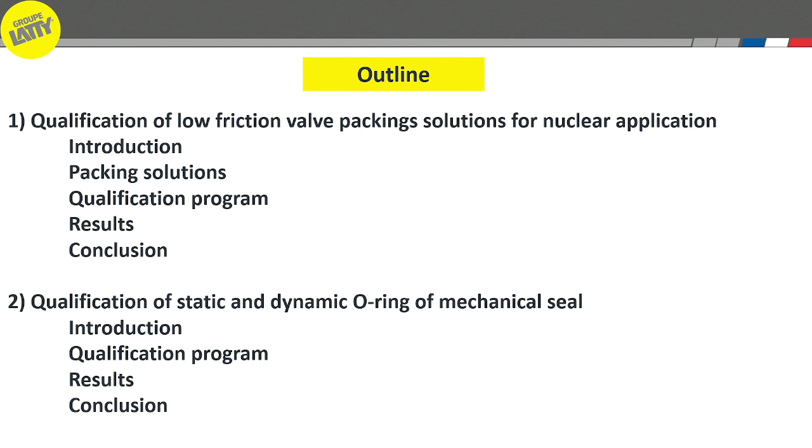Today I have the pleasure to present a couple of studies aimed at the topic of post-Fukushima sealing solutions, with two sealing solutions: a gasket solution, an O-ring solution, and a packing solution for valves. The outline of this presentation is divided into two subtopics. The first topic concerns qualification of low friction valve packing solutions for nuclear applications, while the second study concerns qualification of static and dynamic O-rings for mechanical seals, also dedicated to nuclear applications.

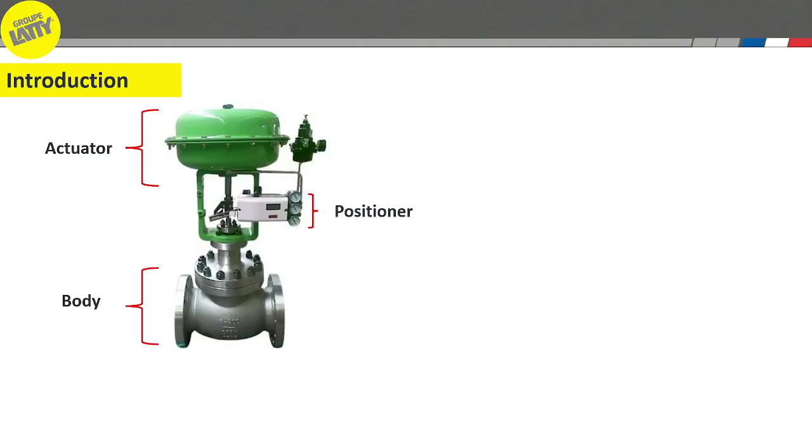Let's start with the first study. Here we have an example of a valve. The main structure of a valve is composed of an actuator which drives the stem, and a positioner which gives us the desired position of the stem, and we have a body where the pressure is confined and sealed.

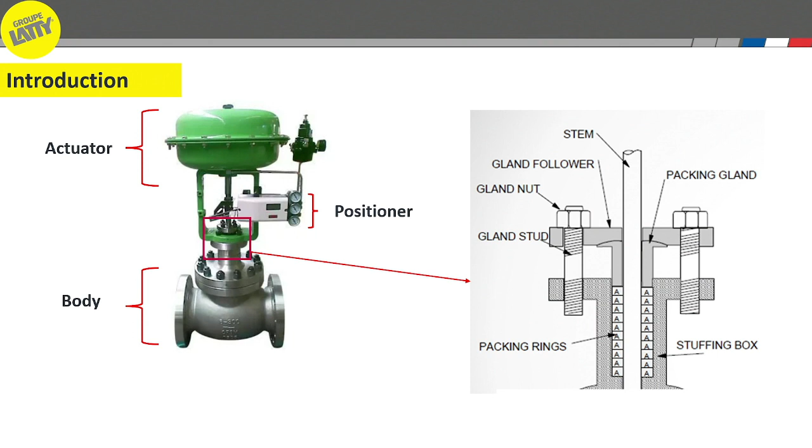In the valve, generally you find a sealing solution to avoid fluid escaping from the confined fluid to the atmosphere. Here we are concerned with a packing solution. A packing is generally composed of rings stacked in the stuffing box and compressed by means of a gland follower due to the force and effort generated by the tightening system. The basic composition of packing is shown here, and the ultimate goal of such a sealing solution is to prevent fluid escaping from a high pressure confined fluid to the atmosphere environment.

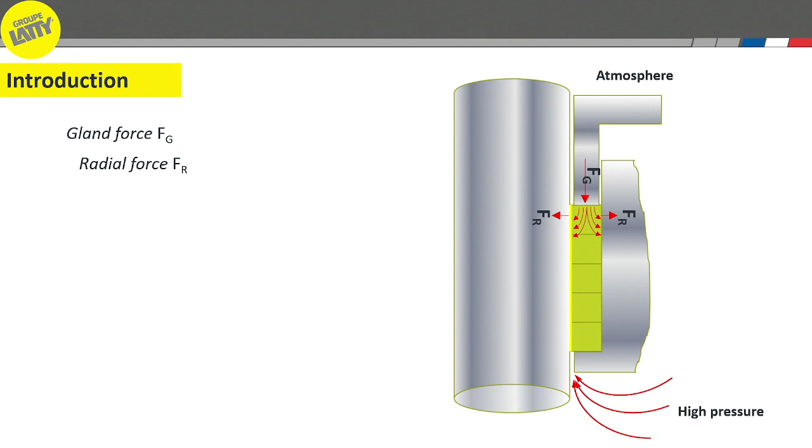With a packing solution, this is seated by means of the gland force applied by the gland follower on the ring stacking, which is then converted to a radial force and an axial force, transmitted and repeated through the stuffing box.

When the stem is actuated, we create a relative movement between the stem and the sealing packing, and this generates a dynamic friction force between the two moving parts. This gives us a general situation: by increasing the gland force, we tend to eliminate the leakage, but at the same time we increase the friction coefficient.

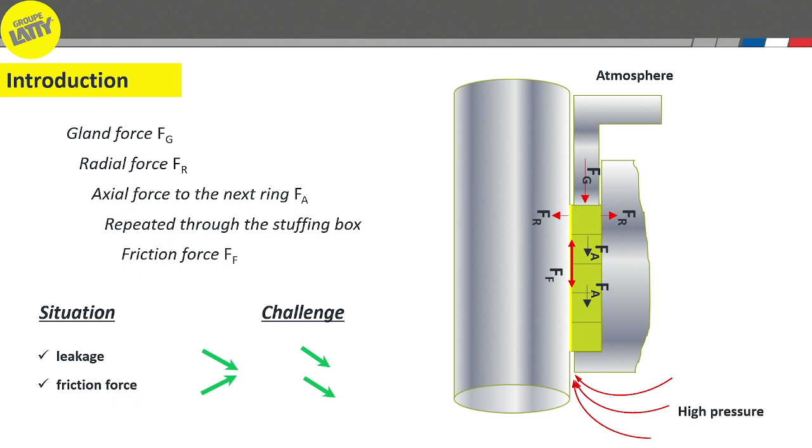The desired and ultimate goal when designing a packing solution is to get a solution where the friction coefficient is the lowest and the leakage is eliminated. So the aim when designing a packing is to achieve both tendencies: eliminate leakage and fluid escaping, while reducing the friction coefficient as much as possible.

The friction coefficient of packing is one of the most crucial parameters which directly influences the maneuverability of a stem on a valve, and this parameter was identified by EDF as one of the axes of improvement in order to avoid changing the actuator's strength and power, and to avoid heavy modifications on the valves.

In this context, LATTY International developed two kinds of solutions with different materials dealing with this issue, to achieve a low friction coefficient which allows us to avoid tough modifications of the valves. These two developed solutions needed to be qualified. A partnership was launched by EDF to qualify these two products, and this qualification was carried out within the CETIM laboratory.

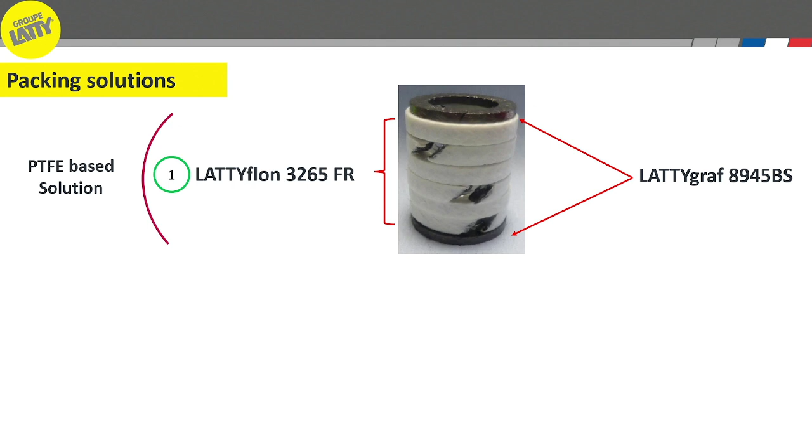Now we will see the sealing solutions together. The first solution is a PTFE-based solution, composed of sealing rings and end rings at the top and bottom. The sealing rings are a combination between the LATTYflon 3265FR and the LATTYgraf 8945BS. The second solution is a graphite-based solution, a combination between the LATTYgraf 9110, and we kept the same solution for the end rings, which is the LATTYgraf 8945BS.

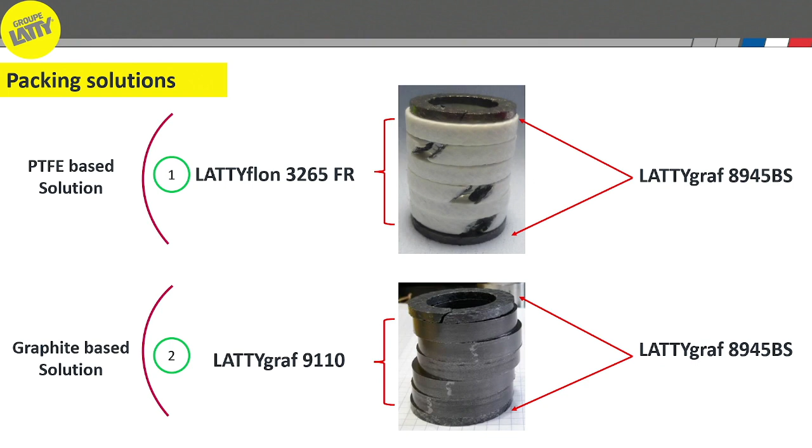To see this in detail, the LATTYflon 3265FR is a PTFE impregnated carbon yarn in the middle of the ring, in the core, covered with PTFE braided yarn treated with a special lubricant in order to reduce the friction coefficient. All this material has been treated with a corrosion inhibitor in order to protect and avoid any chemical corrosion reaction between the stem and the sealing solution.

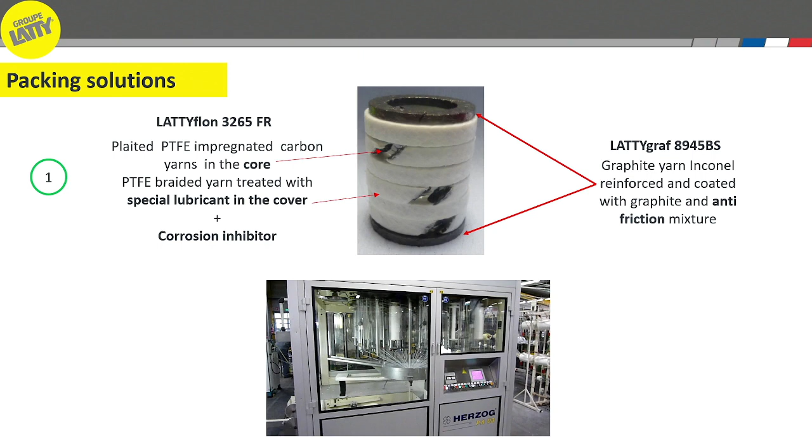While the LATTYgraf 8945BS is made of graphite yarn, Inconel reinforced, and coated with graphite and also a kind of lubricant or anti-friction mixture. To show you the braiding process, I have a movie. I'll try to start it for a few seconds to show you the braiding process.

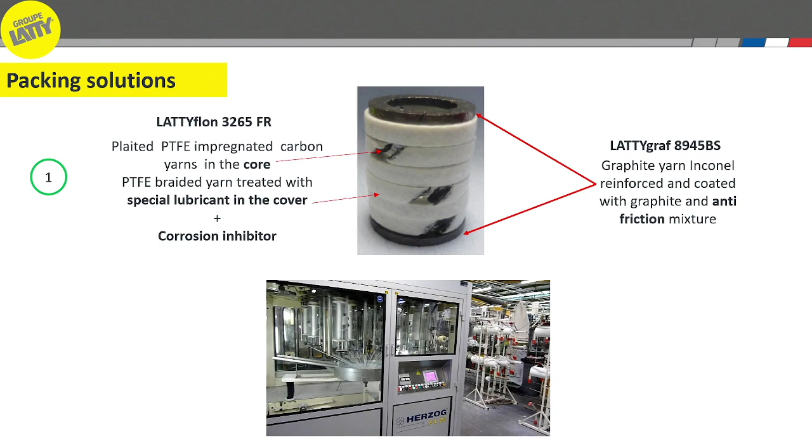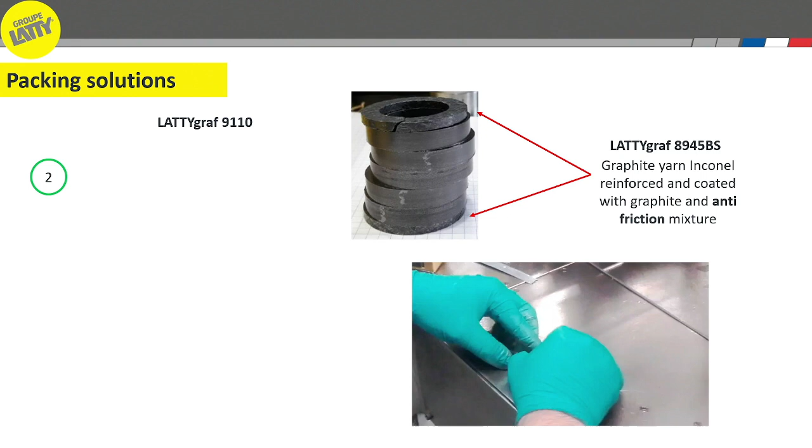For the second solution, which is graphite-based, we have the LATTYgraf 9110, made of high purity expanded graphite impregnated with the same special lubricant, pre-compressed and treated with a corrosion inhibitor. For the end ring, we kept the same solution with the LATTYgraf 8945BS. The pre-compression can be made in different ways.

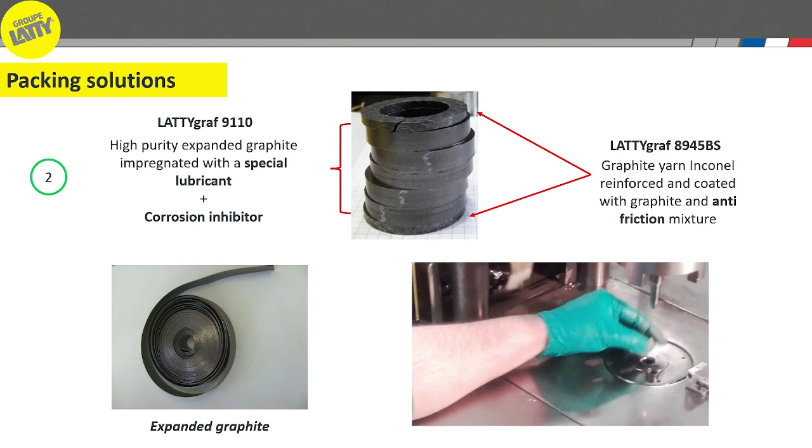Here we have a semi-automatic manner to show you how the expanded graphite lubricated impregnated material is manufactured. Here we have an example of small rings.

To qualify these two products, a testing campaign was carried out in collaboration with EDF and CETIM, consisting of two protocols. The first protocol aims to qualify or test under normal conditions, including corrosion tests at high and ambient temperature, and mechanical cycling to test the mechanical behavior of the packings.

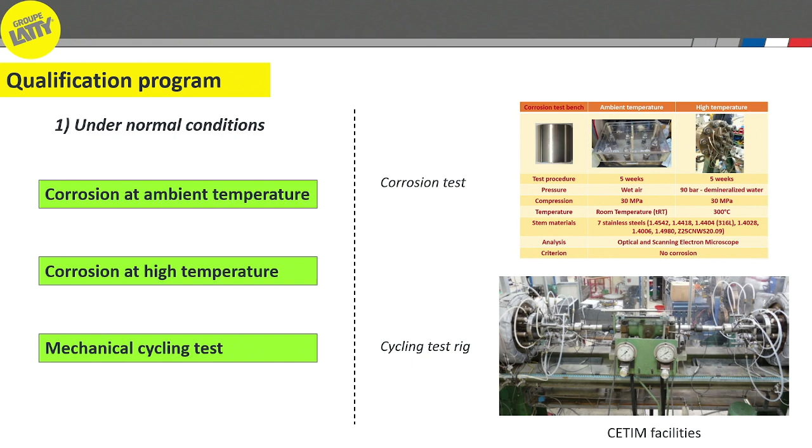The second test concerns assessing and analyzing the packing against accidental conditions, which is much more severe and needs a lot of care with the saline solution.

The tests start with a tightening test with air, followed by a cycling test with at least 1,500 occurrences. After that, the test cell is dismantled and put in a reactor to be exposed to gamma rays.

The radiation exposure goes step by step: first a step of irradiation absorption, then functional tests followed by tightening tests. If the results meet the requirement, we go to the next irradiation step, and so on, until we reach a maximum absorbed dose of 4 megagray.

After that, the test cell or packing is dismantled and analyzed. All these tests were carried out within the CETIM laboratory with their own facilities.

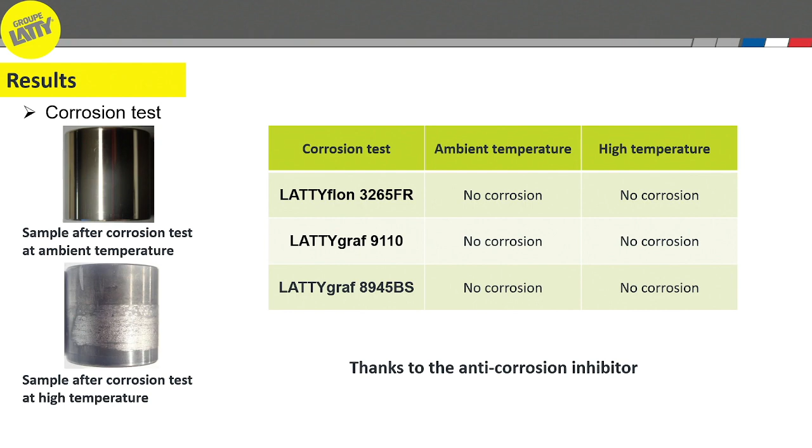For the cycling test with the graphite solution, here's an example where we assessed the leakage and friction coefficient. For a functional test under nominal conditions, the maximum leakage allowed is about 5 milliliters per hour.

During all the tests, no leakage was observed. In terms of friction, it should be noted that the coefficient given here is a modified friction coefficient, not the real friction coefficient. The results show that with this new generation, the friction coefficient was reduced compared to the previous solution, with about 30% gain.

This was first seen at the beginning of the test. After that, the friction coefficient increased gradually as a function of cycling, but did not exceed the maximum limit allowed, which is a value of 12.

After that, another test without pressure was realized, and we found that the friction coefficient was stable in the range between 10 and 12. This is for the graphite solution.

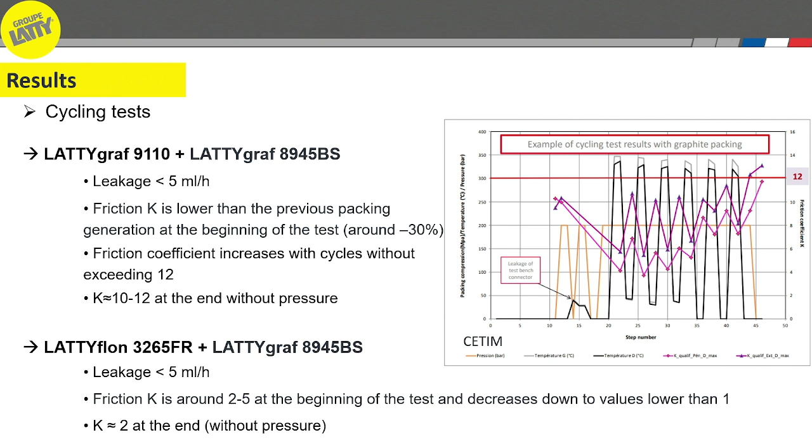After that, we made a test without pressure, and the results show that the friction coefficient was stable, averaging a value of 2. So this is for nominal operating conditions.

The most important result is that after radiation exposure, the friction coefficient was assessed, and interestingly it remained stable, the same as before the irradiation tests. The same was done with the PTFE solution, with the same conclusion: the friction coefficient before and after irradiation remained the same and constant.

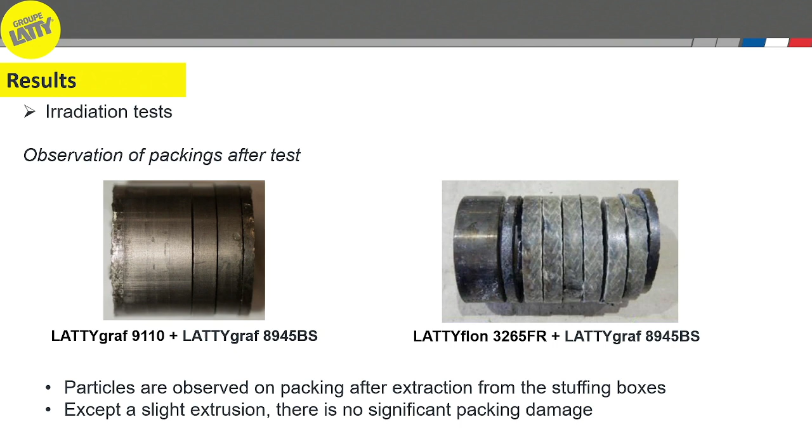When the test finished, the packing was dismantled and analyzed, and no excessive damage or abnormal degradation was observed on either solution, except some extrusion and abrasive particles, which is quite logical due to the nature of the graphite and PTFE. No abnormal or excessive damage was seen even at this level of radiation absorbed dose.

To conclude this first presentation: in order to qualify a new sealing solution with low friction coefficient, a partnership was launched by EDF. LATTY brought out two solutions reducing friction coefficient, giving a reduction of about 30% up to 70%, depending on the nature of the solution, whether PTFE or graphite.

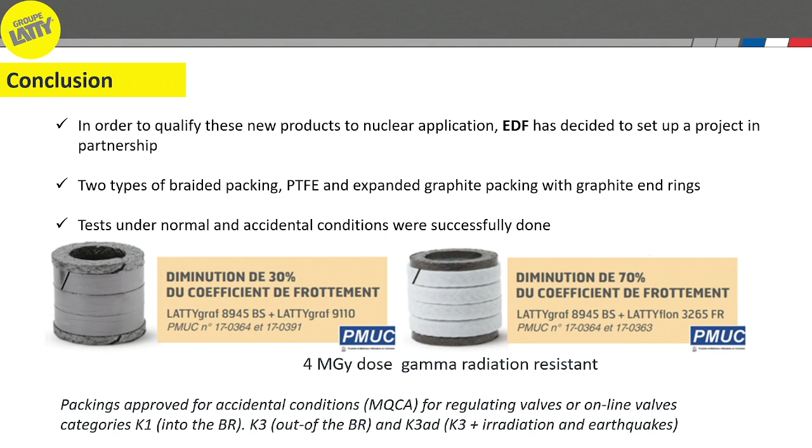Most importantly, this qualification shows resistance to high absorbed dose, assessed here up to 4 megagray. After this testing and qualification, the packing has been approved for accidental conditions, for regulating or online valves of different categories, and most importantly for operating conditions involving irradiation and accidental conditions.

So now we move to the second presentation, which also concerns operating conditions in irradiated environments. But here we are concerned with elastomer, a kind of organic material that is more sensitive to irradiation.

Here we have a cross-section of a mechanical seal. In a mechanical seal, O-rings are widely used due to their elasticity and usefulness. We can find two configurations of O-rings: static configuration and dynamic or semi-dynamic configuration.

In the context of developing ultimate safety pumps, there was a need to develop new performant mechanical seal, and LATTY International proposed to qualify mechanical seal with O-ring solution. In order to do so, we have to qualify the elastomer, which is the most sensitive in the mechanical seal. So to do this, LATTY International invested and carried out a study to develop new elastomer and qualify them.

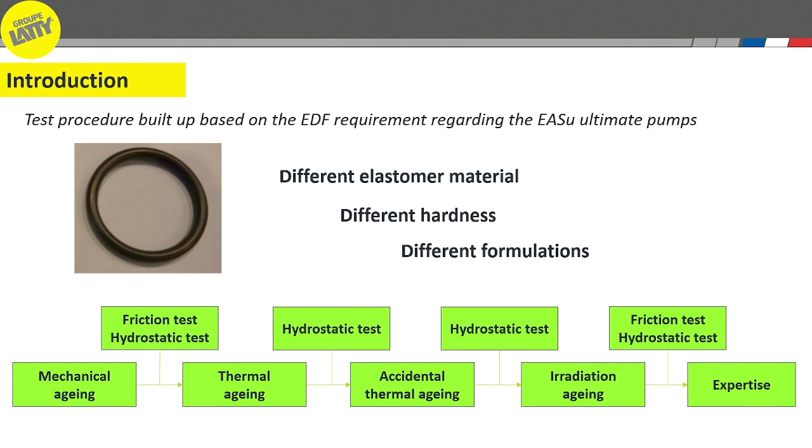To see the qualification procedure in detail: we made mechanical aging cycling during 500 hours, followed by thermal aging during 250 hours, followed by another kind of aging named accidental aging, and at the end we finished the test with irradiation, with a maximum absorbed dose of 1,700 kilograys.

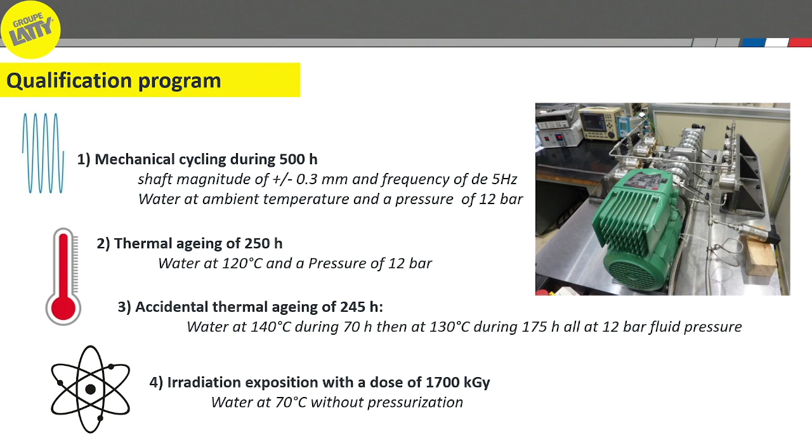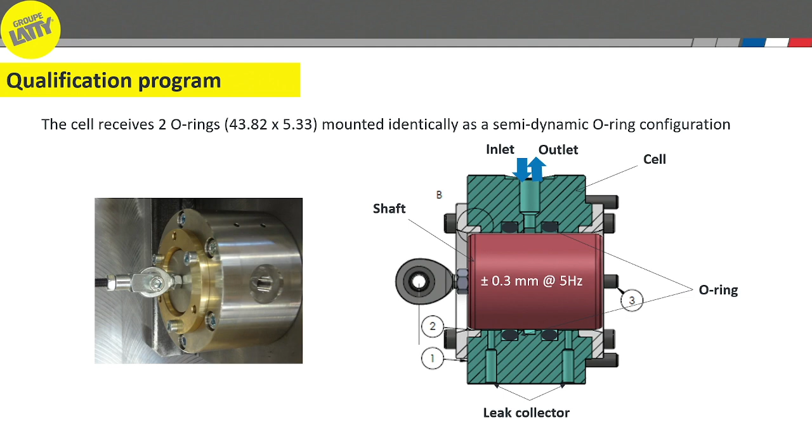Here we have the testing cell given in detail. We fit two identical O-rings in a test cell, which allows us to fill it with water, and the shaft can slide with a magnitude situated between minus 0.3 and plus 0.3 with a frequency of 5 Hertz. Here we have the elastomer, which was developed and qualified during this study, which is a special EPDM material.

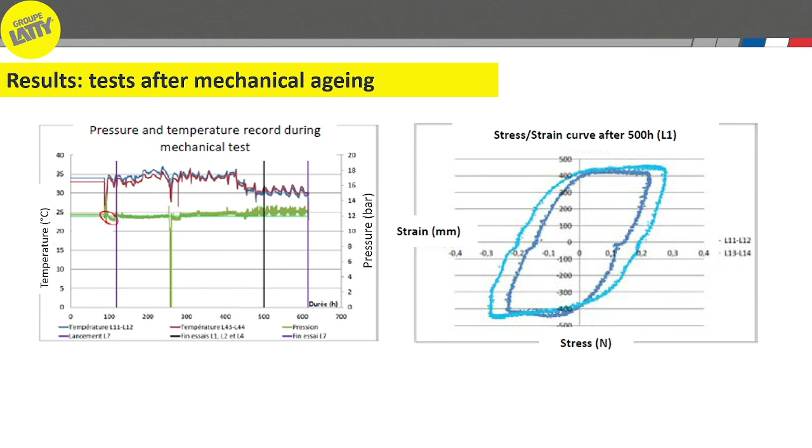Now we'll see together the results. Here we have the result of the mechanical aging, the recorded parameters, and friction test in order to assess the level of friction created between the sliding shaft and the O-rings.

After this, hydrostatic tests have been made at a pressure of 14 bars during 15 minutes, and the results showed no leakage was observed, the leakage was nil.

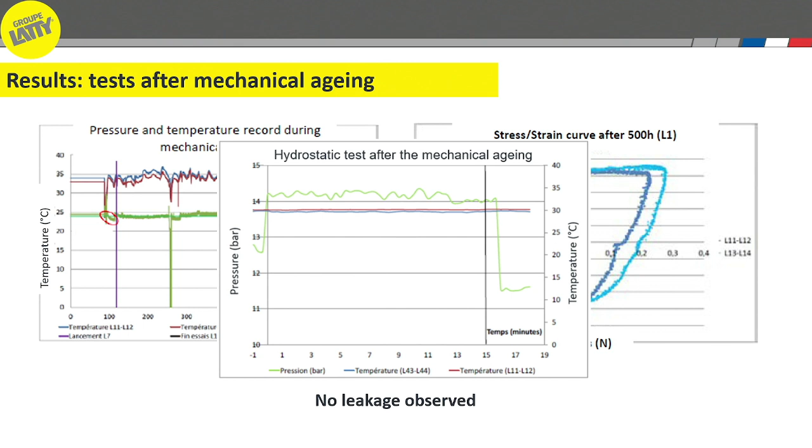After that, we moved to the thermal aging, and we made hydrostatic test in the same manner, and no leakage was observed. We did so with accidental thermal aging as well.

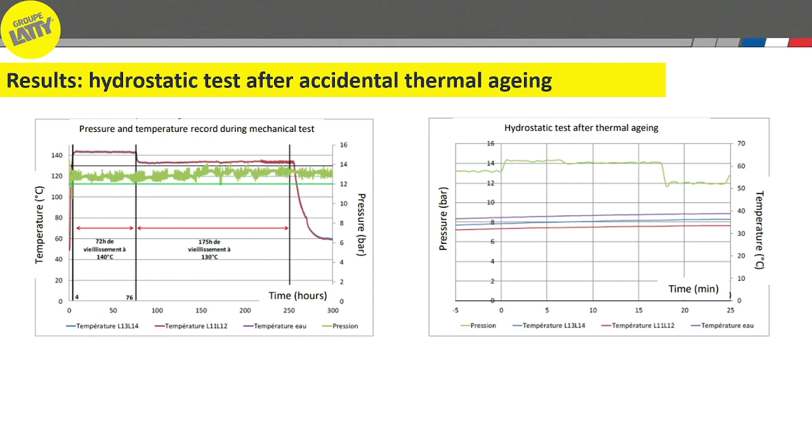Here we have the recorded parameters and the hydrostatic test, and here also no leakage was observed.

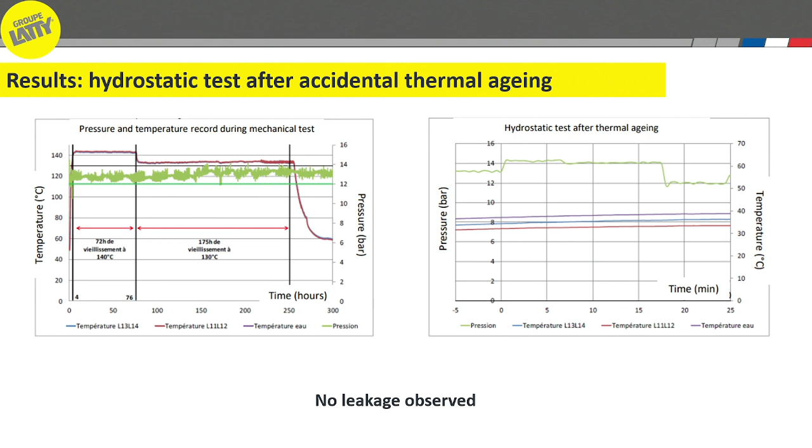After all this mechanical and thermal aging, we made the irradiation test, and after that the testing cell was assessed in terms of friction reaction, and the result was compared to the one observed before the test. Here we have an O-ring with absorbed dose of 1,700 compared to the new one.

Compared to the new one, the results showed no deviation was observed between the new one and the aged one.

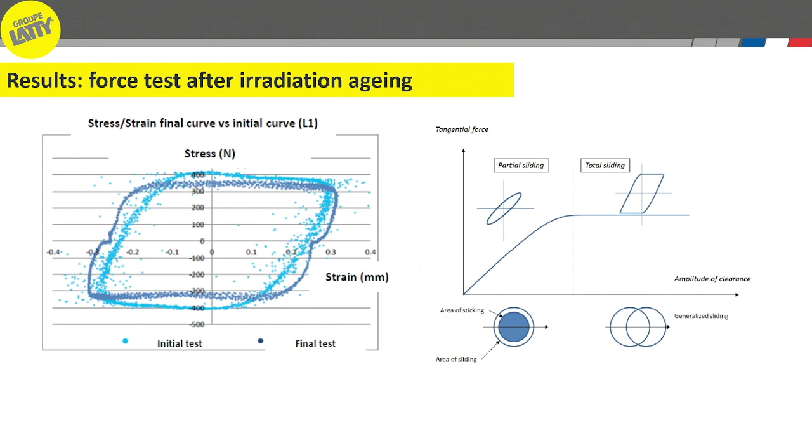The most important result is the signature or behavior of the O-ring, which kept sliding without wrapping, which is quite important because this way we eliminate a kind of tear and shear stress on the O-ring, and we increase its lifetime. So here we maintained a good or desired behavior.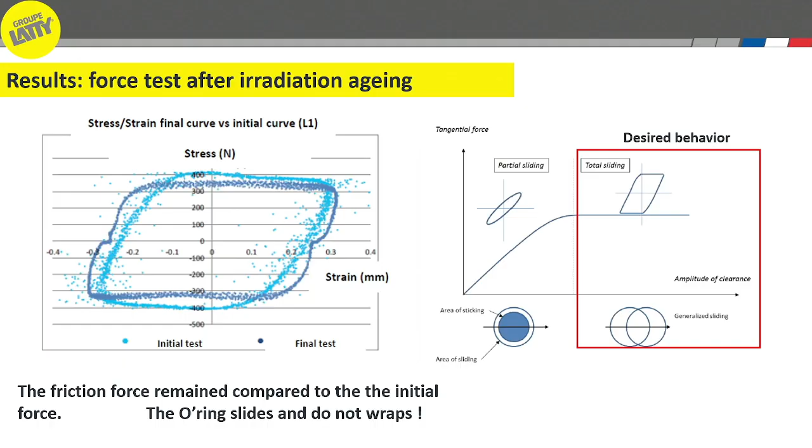After that we also made hydrostatic test, and during this test we increased the pressure up to 25 bars instead of 14 bars, and the results here also showed no leakage.

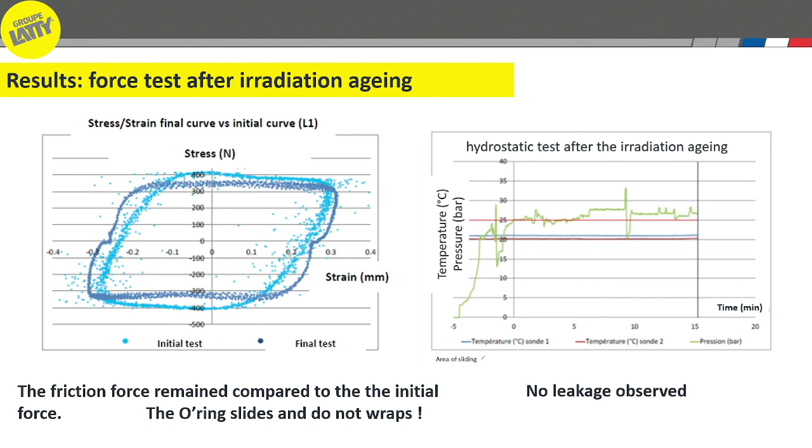After all the overall tests, we dismantled the samples and analyzed them. We measured the mass before and after, and no deviation was observed.

In terms of observation, a cross-section of the O-ring gives a good aspect, and most importantly, there is no extrusion observed on the O-rings. This is probably due to the sliding without wrapping.

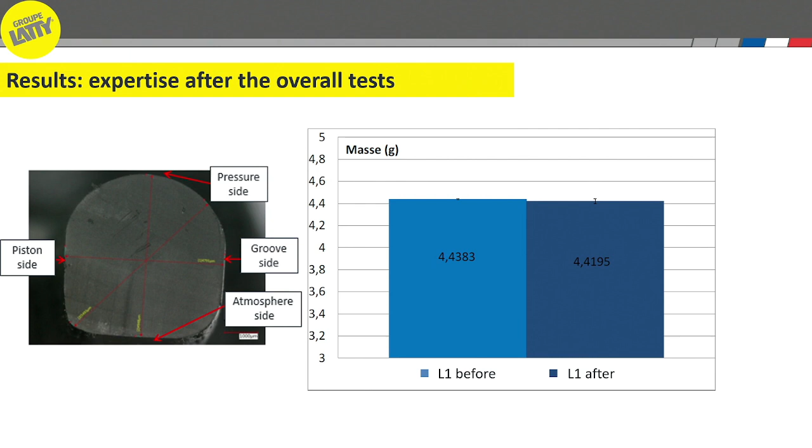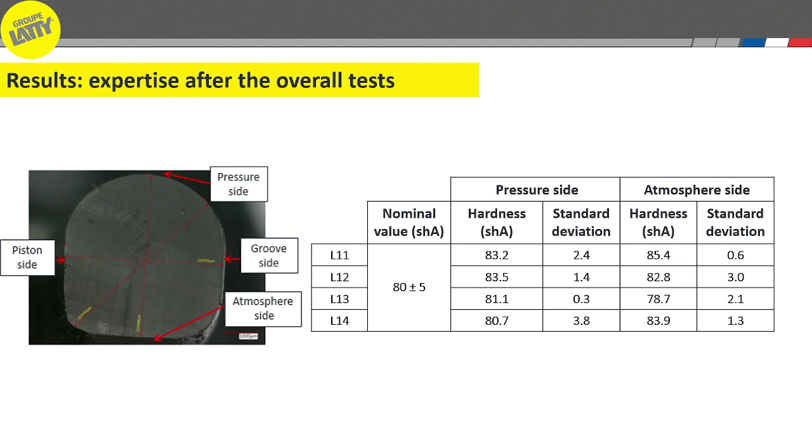This result was confirmed by the measure of hardness before and after the test on different sides of the O-ring, and we can see that the hardness level measured after the test remained at the same level and same uncertainty as a new O-ring, which is a quite interesting and good result.

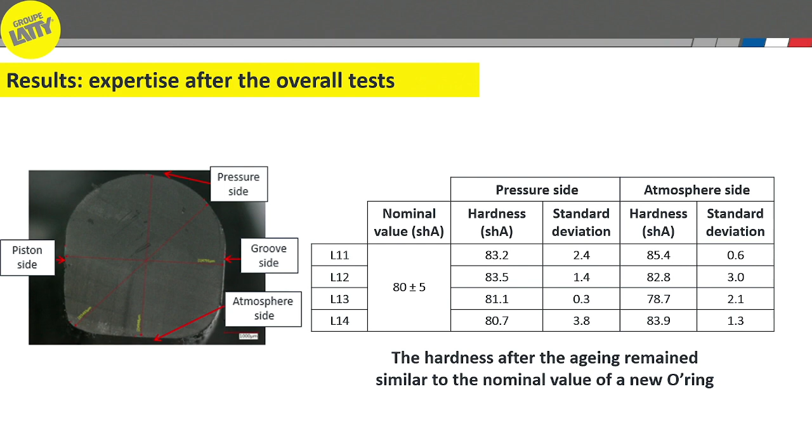To conclude this presentation, an experimental qualification has been carried out and presented here. Through this qualification, we approved the elastomer for high gamma ray absorbed dose, and the O-ring was qualified for static and dynamic configuration or application.

Another important thing to point out is that the elastomer formulation meets the chemical specification of the PMUC regulation, which limits the maximum content of sulfur and halogen in the product. So the O-ring has been homologated as a PMUC product.